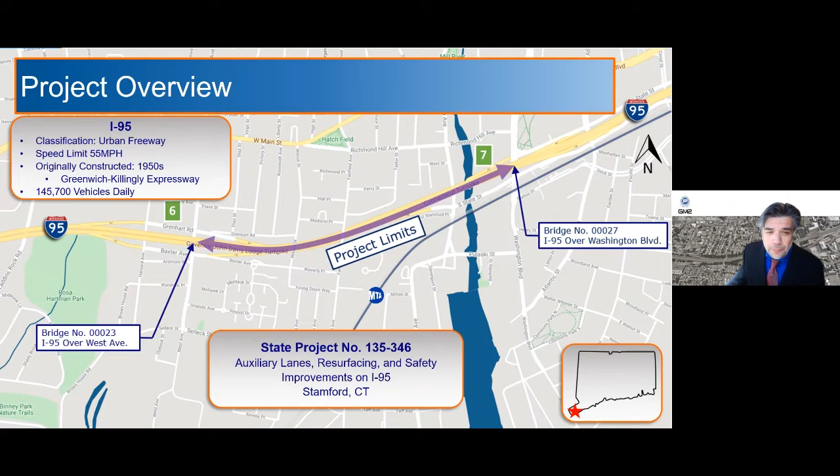The primary purpose of this project is to provide operational improvements and congestion relief. This will be achieved by adding an auxiliary lane between exits 6 and 7 for both northbound and southbound. An auxiliary lane is essentially a lane added between interchanges.

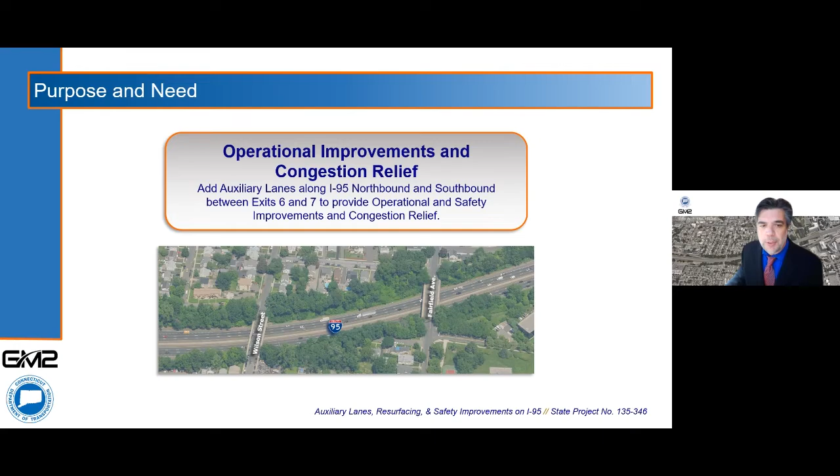The secondary purpose of this project is to extend the service life of I-95. As noted, the highway was originally constructed in the 1950s, and the underlying pavement is almost 70 years old. It has reached its useful service life and requires pavement rehabilitation.

There are also 3 bridges in this contract: Bridge number 24, which is Wilson Street over 95; bridge number 25, which is Fairfield Avenue over I-95; and bridge number 26, which is I-95 over Rippowam River. These bridges will be brought up to a state of good repair. Work will be maintenance related in nature, spot painting, pavement resurfacing on bridge 26 in particular.

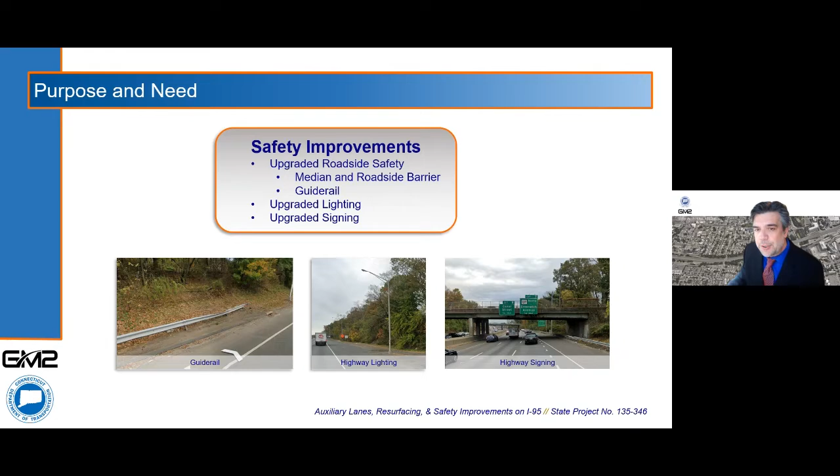At this time, I'd like to turn the presentation to Ryan Allard, our lead highway engineer, who will discuss the proposed design in more detail. Ryan.

Thanks very much, Tony. Again, my name is Ryan Allard, highway lead for GM2 for this project. Before we get into the design, I'd like to give you a little bit of the lay of the land. The typical section that you're seeing here, I'll just define the existing corridor.

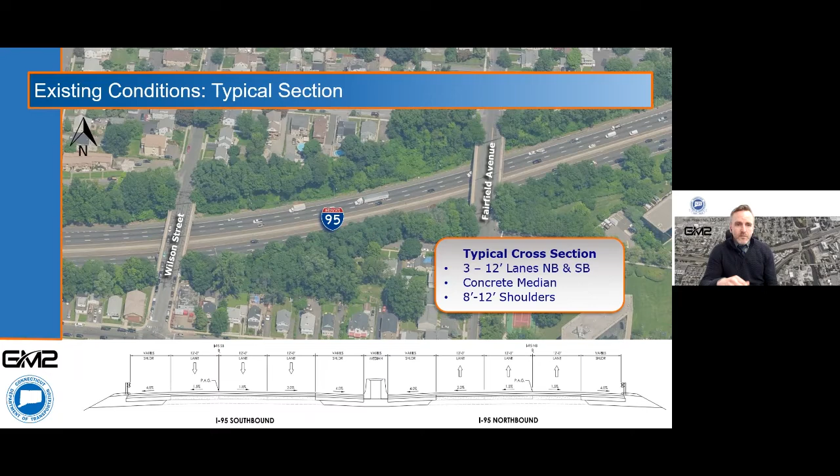Here you're looking at I-95 from left to right, and north is facing up, and New York is to the left of your screen. You have the Wilson Street overpass and Fairfield Avenue overpass as well. Down below, you see a typical section.

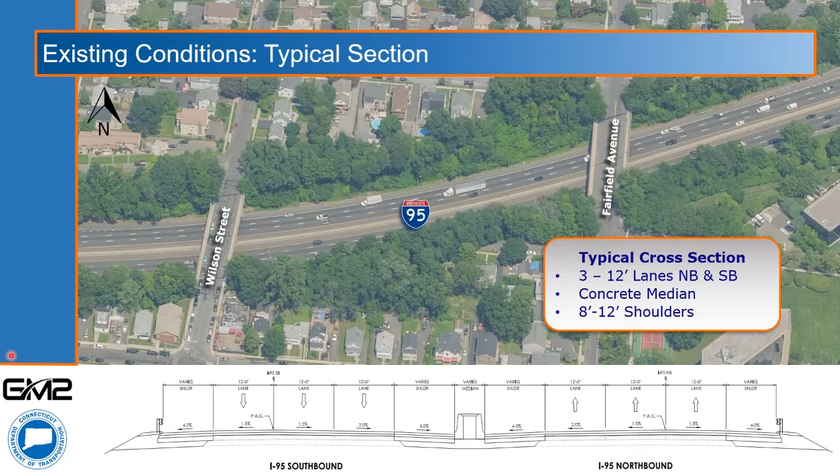This is meant to just represent roughly what the corridor is, nothing very specific here. Right now there are 3 lanes in either direction, separated by a concrete median, with shoulders to the outside and shoulders to the median as well. There are 3 12-foot lanes in both directions, separated by that concrete median. The median shoulders are primarily 12-foot in width. However, along the outside, it varies slightly, so it's about an 8-foot to 12-foot, depending on where you are in the corridor.

A little bit more existing information. Here's the crash data shown graphically. There is a UConn Crash Repository, which is an online resource that we use in order to determine some of the characteristics of the site as it relates to public safety, operations, and congestion.

We took the last 3 years of data from that crash repository, including and up to April of this year. The crash counts for that included 237 total crashes. 73 of those resulted in injury and 0 fatalities in that data set.

What we'd like to do then is take that crash data and process it a little bit and understand the characteristics of the site. So what I mean by that is we have 161 rear-end crashes, which indicates that there's quite a bit of congestion in the area, a lot of bumper-to-bumper traffic, so a lot of front-to-rear crashes. And 53 side swipes.

That's the second most predominant crash type in this area, and what that is telling us is there's a lot of lane changes. So you have a lot of merges and diverges where people are either entering the highway or exiting the highway. It's pretty common for an area like this where you have two interchanges. You can see interchange 6 here and interchange 7 here, not separated by a lot of longitudinal distance. So when you have a lot of people entering and exiting the highway in a very short period of time, you end up with some of those lane change crashes as well.

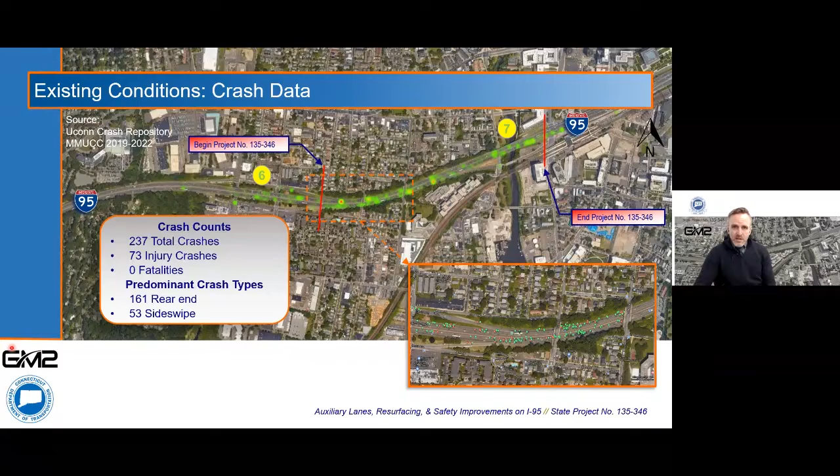At the very outset of the project, we wanted to get a better sense of the condition of the pavement in order to increase the serviceability and serviceable life of the corridor. We want to find out what is the existing condition of the highway itself.

Next is ground penetrating radar, or GPR. There you're using a vehicle to send a signal into the pavement, into the flexible pavement, which is the asphalt. It shoots a signal back to us and tells us more about the condition of the flexible pavement that's on top of the concrete pavement below.

Next, we do a falling weight deflectometer test, or FWD. That's giving us a sense of the health and condition of the concrete slabs below the flexible pavement, and the health of the connection between two slabs as you're traveling along the highway.

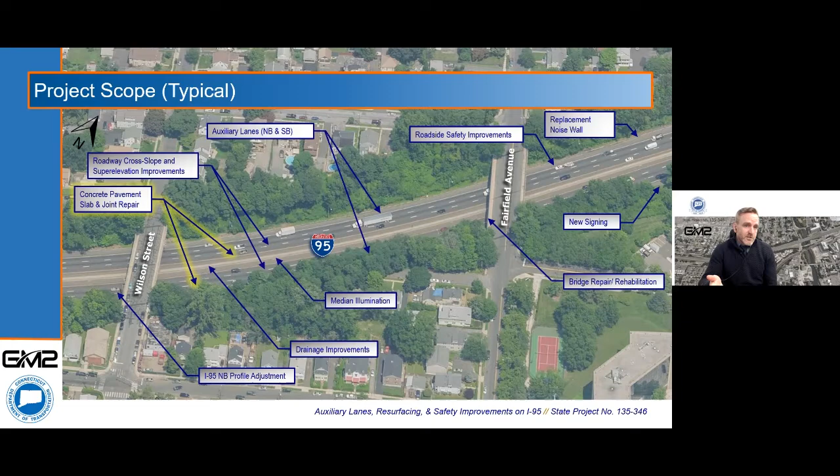First, as I mentioned, we're going to look at the concrete pavement slabs and the joints, and using the data that we found, determine where those repairs are going to be necessary.

There is a profile adjustment that's necessary underneath the Wilson Street Bridge. I'm going to go into a little bit more detail as to why that's happening.

Roadway cross slopes: anywhere that overlays over a period of time have reduced the design speed of the highway itself, we're going to try to bring those back up to DOT standards.

Drainage improvements throughout this area. We are doing some widening as well as cleaning of the existing drainage network.

Median illumination. Right now there's illumination on the outside. We're going to move that to the median wherever possible.

We did mention the new auxiliary lanes, one auxiliary lane for each bound. So where there's an existing 3 lanes, now there's going to be 4.

And bridge repair rehabilitation. There are 3 bridges within the corridor. And roadside safety improvements. Tony mentioned MASH earlier, so any roadside safety, which is going to include any barrier or metal beam rail. New signing.

All signs in this corridor are going to be replaced. And anywhere that a noise wall is impacted by the widening that's happening, this is specifically what you're looking at here, on the north section of this corridor, and we'll go into a little bit more detail on that as well.

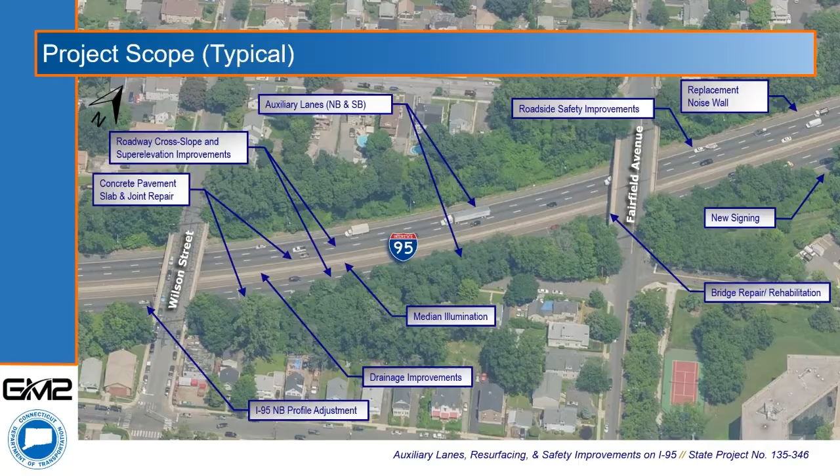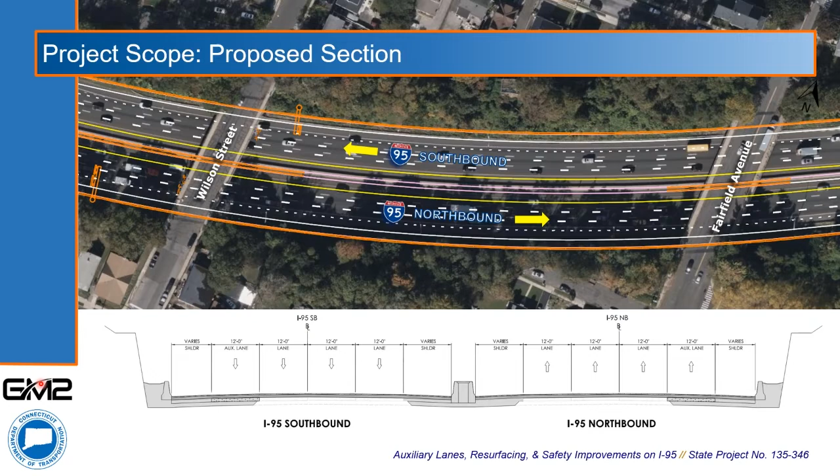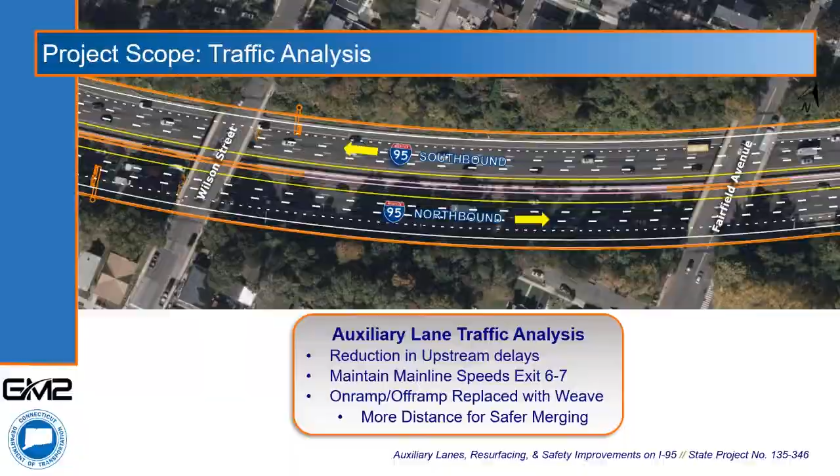So when we were first deciding if we were going to add these auxiliary lanes, we did a traffic analysis. This resulted in us finding that there is a reduction in upstream delays. That means if you're traveling southbound back towards New York, you're going to experience less delays without this bottleneck that's occurring today. You're able to maintain those mainline speeds, so the highway speeds going through this corridor are going to stay at a safe speed.

This is primarily due to what I was talking about earlier, where in the existing condition you have a lot of travelers coming onto the highway and exiting the highway and having to merge into that outside lane. You no longer have that condition with an auxiliary lane. You have a longer, safer longitudinal space in which to get on or off the highway.

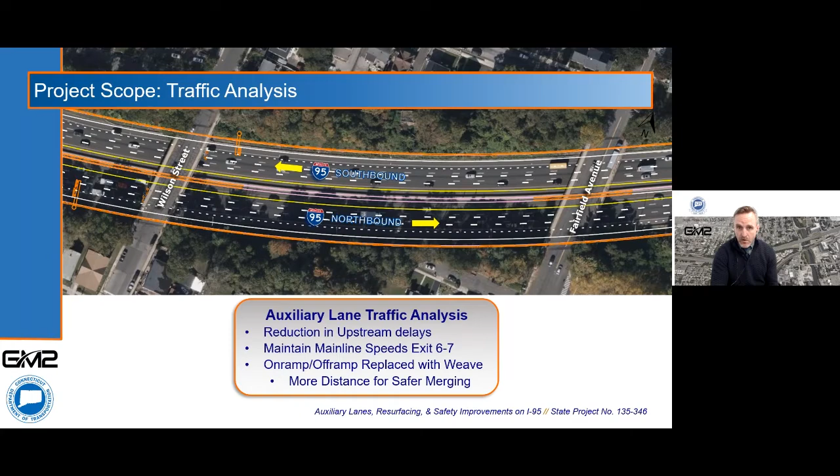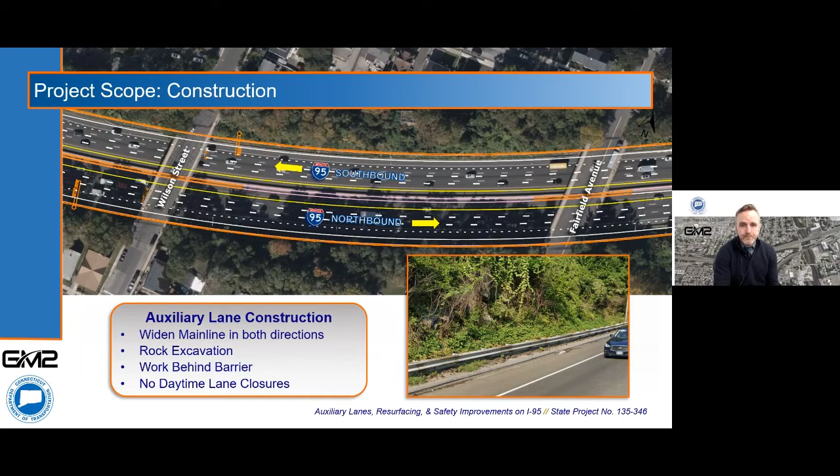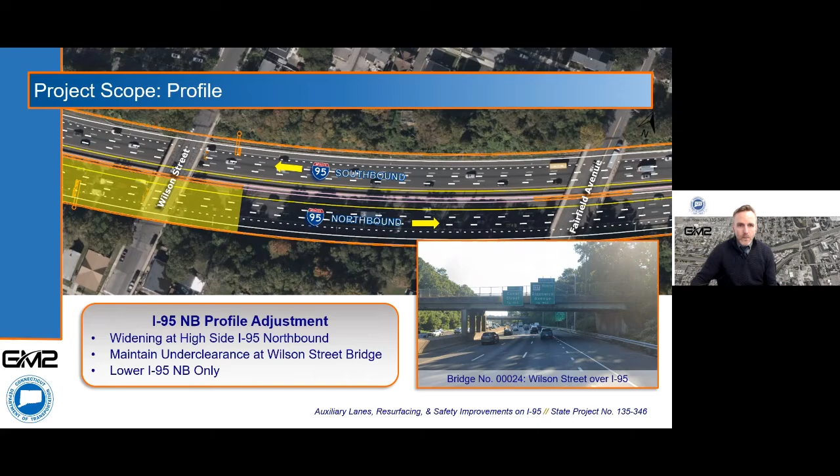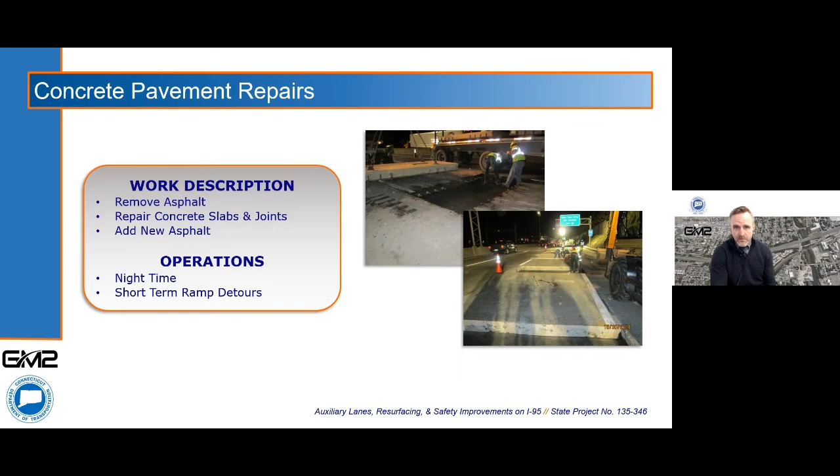There are 3 bridges within this corridor: Bridge 24, 25, and 26. Those are the Wilson Street Bridge over 95, Fairfield Avenue over 95, and 95 over the Rippowam River. Some of the scope happening on these bridges includes some barrier work, some roadside safety to protect the bridge elements. We are widening towards abutments and also just increasing the standard safety of the area. Some steel maintenance of the overpass bridges, as well as some overlay of Bridge 26.

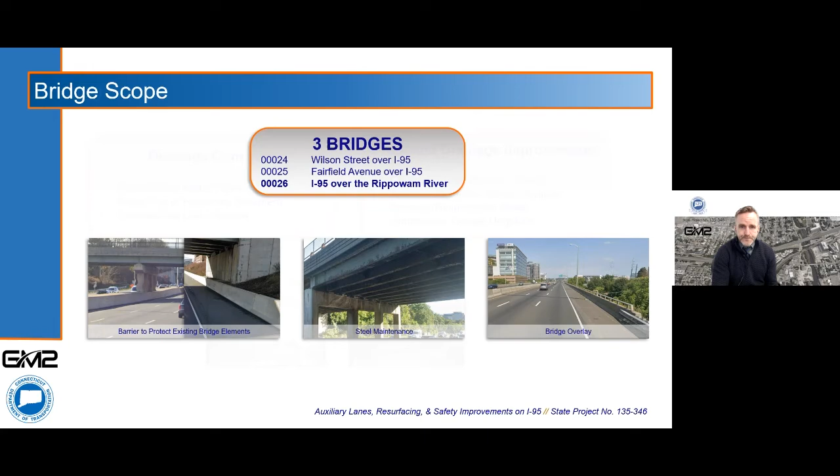Talk a little bit about the drainage in this area. So there are some drainage concerns in this corridor, or any corridor of this age. A lot of the metal pipes have reached their serviceable life, or they are beyond it. So we are going to take a look at those. A lot of them are full of hardened sediment, and as you can see in the picture below, it's a bit more than just sediment.

A lot of the catch basins in the area are deteriorated and in some state of disrepair. So proposed drainage improvements include cleaning pipes and catch basins as necessary, adding new catch basins where required. We're widening either side of the highway, so catch basins at the current edge of pavement need to move to the new edge of pavement. Those will be new basins, not moved ones. We'll also replace or reline any metal pipes wherever necessary, along with some stormwater quality upgrades in keeping with MS4 guidelines.

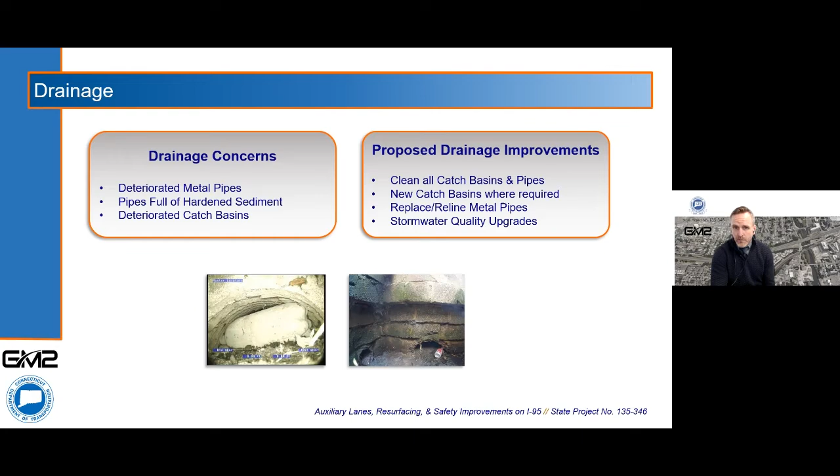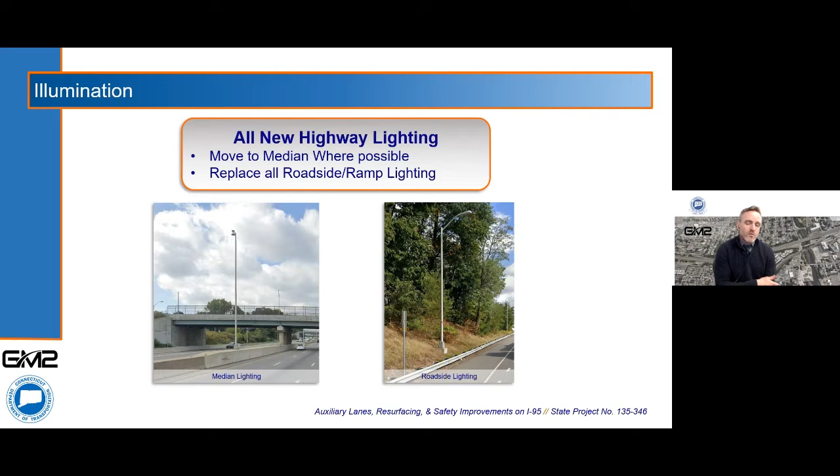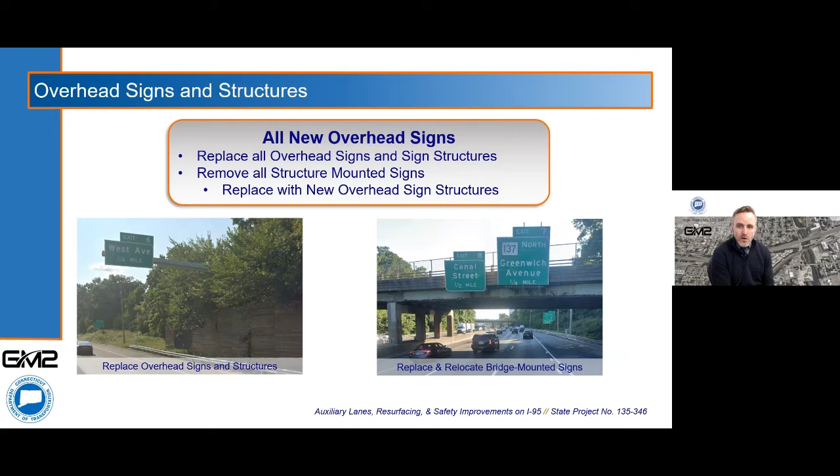I mentioned some lighting - all new lighting is going to be installed here, so every light fixture will be replaced. Wherever possible, we're going to move that lighting to the new median. And overhead signs - all signing is going to be replaced as part of this project. If there are overhead sign structures, those will be replaced and new signs added. Any signs attached to the outside of existing structures, like the overhead signs attached to Bridge 24, which is Wilson Street over 95, will be taken off and added to a new overhead sign structure.

Next, is this a type 1 project? There are numerous options for why this would be a type 1 project, and as we mentioned numerous times, we are adding auxiliary lanes to either direction, so yes, this is a type 1 project. The noise study is ongoing - we're looking into the area and determining if noise abatement measures are required for this project. That study is ongoing and we don't know those limits yet, but we will.

In terms of staging, I'll go over briefly how it impacts your commute and nightly life. The criteria is 11-foot travel lanes, 2-foot minimum shoulders. As you can see below, there's some milling operation behind cones, and on the right you can see lanes free with barrier on either side. If any lane closures are necessary, whether for drainage repairs, concrete pavement repairs, or just milling and paving, those will happen at night and possibly on weekends, but very short term. The very next morning, all lanes will be open and traffic will flow freely.

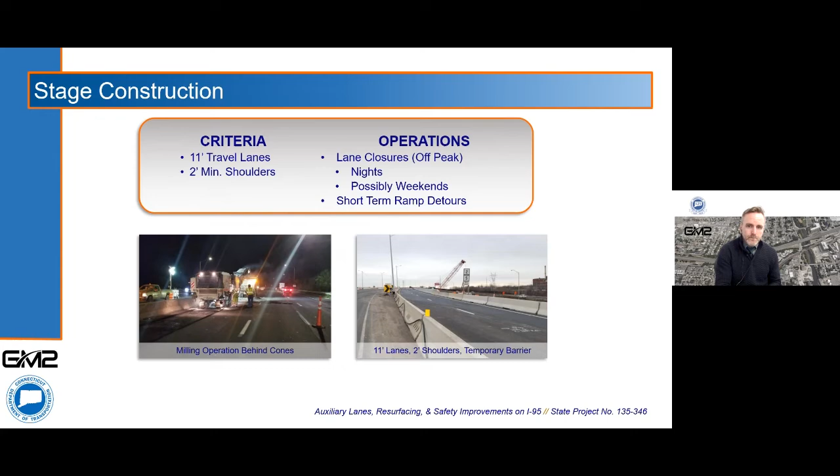In terms of permitting, to attain the necessary permits for a project of this size, we have to go through various agencies through the state and coordinate those as the project goes. We will obtain necessary permits for flood management and construction activities. As design progresses, coordination will also happen with agencies such as the Coast Guard, Fisheries, and Army Corps. There are no proposed impacts to wetlands or water courses, and no impacts to any 100-year floodplain, so this project is relatively not impactful environmentally to the area.

So that is my piece. With that, I'm going to hand it back to Tony, and he's going to discuss the schedule and costs.

Great, thank you Ryan. As discussed earlier in the presentation, the department has selected this project for a design-build procurement. The design-build team that provides the best value to the state of Connecticut will be selected for final design and construction of this project. The DOT will issue a request for qualifications in early June of this year, then shortlist typically 3 design-build contractors to receive the request for proposals in early August of this year, with final design anticipated to start in the fall of this year.

We anticipate construction or shovels in the ground, in terms of where you really see actual work in the field, in the summer of 2023. We anticipate a 2-year construction schedule. The construction cost is approximately $30 to $40 million, with 90% federal and 10% state funding.

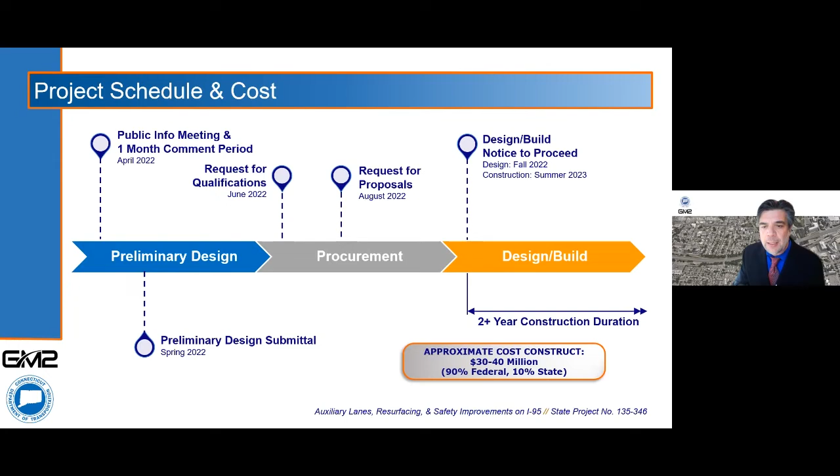As indicated, the project is in the preliminary phases of development, and really the purpose of this meeting is to engage the public. We are here to address your questions as well as understand your concerns. That being said, there are several options for you to submit your questions and comments.

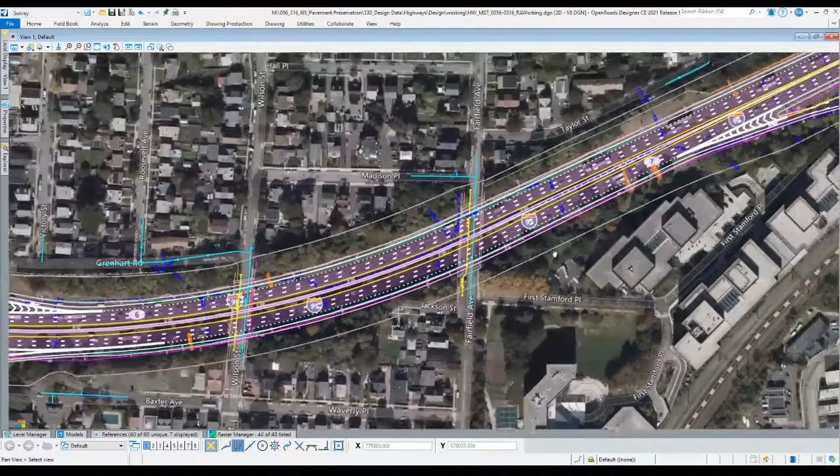Traveling north underneath Wilson, underneath Fairfield, and now you have the northbound exit to Greenwich Ave. The limits extend further over to the bridge, which is bridge number 27 over Washington Boulevard. The project limits also include the southbound on-ramp from Washington Boulevard onto 95 southbound. Back to you, Jeff.

Thank you, Ryan. All right, looks like we have another question that's come in. Somebody asking if there will be any detours associated with the construction. Tony from GM2 is going to take this one. Tony? Absolutely, thank you, Jeff.

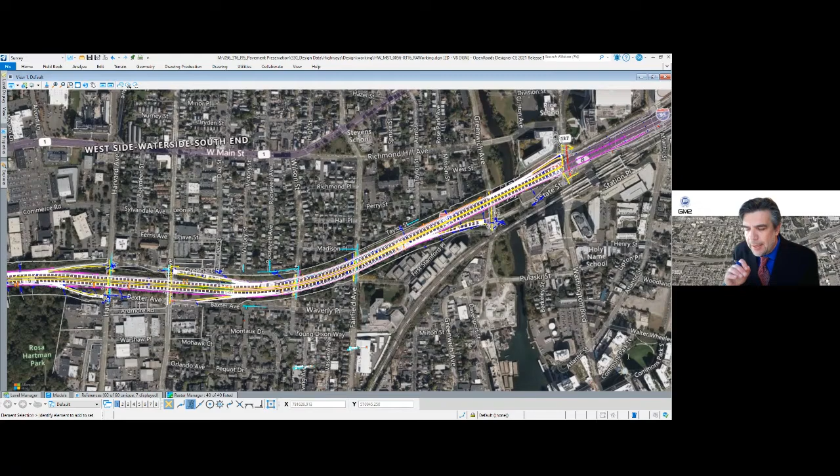Tony Margetta, GM2. So there are no long-term detours proposed under this project. There is potential for some short-term detours during the ramp construction, basically the repair of the slabs if the width of the road is less than 30 feet. Those will be very short-term during nightly operations, off-peak during the 4 to 5 hour night windows. In the morning time, they'll be right back open. So there is potential for some very short-term detours for the ramp work, but those will be off-peak periods during allowable limitations of operations. Back to you, Jeff.

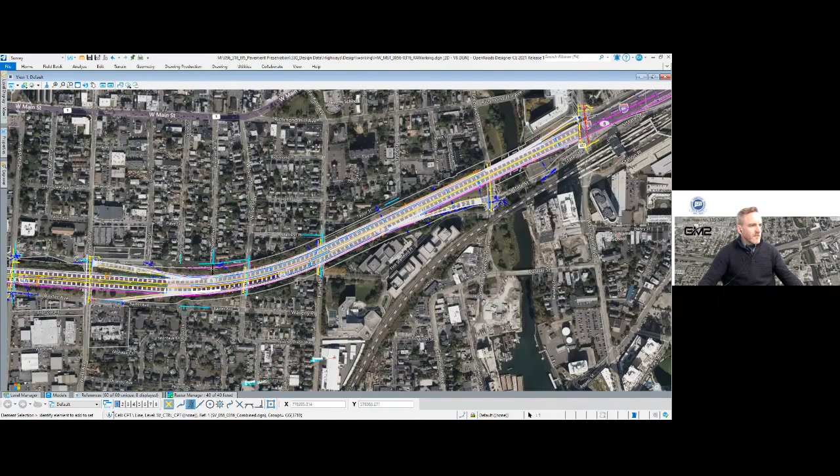I'm going to share the CAD view again, because I think that's the easiest way to give the lay of the land here. We have 95 left to right, New York is to your left and north is up. I'll start at the southern limits.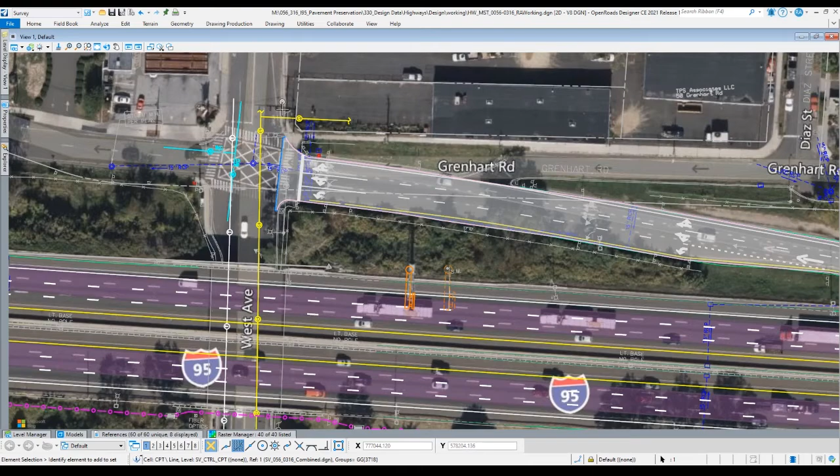So here you have West Ave, and you can see the limits of our impact to the local roads are limited to just the termini of the ramps. As soon as you're off this ramp, you're off the limits of the actual construction of any of the pavement in this area. So West Ave is by and large untouched, as well as Baxter Ave.

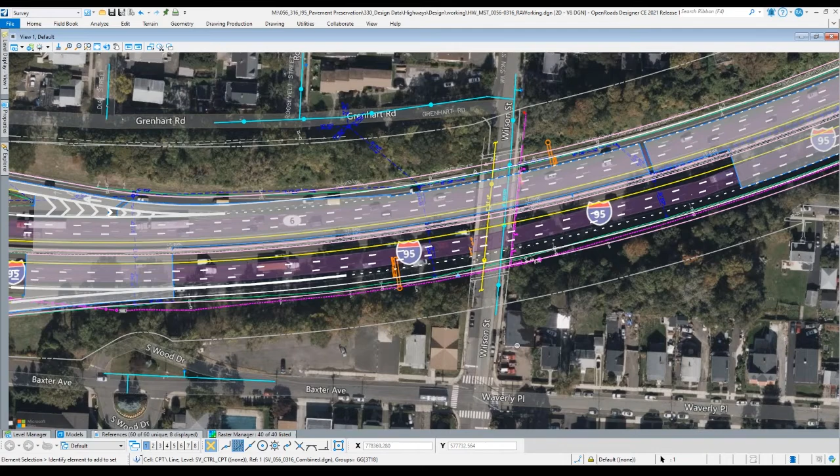As you travel north, this is the Wilson Street overpass, Bridge 24. This is the area where I mentioned in the presentation that we're actually lowering I-95 northbound. The reason why we're lowering 95 northbound as opposed to raising Wilson Street is because we don't want to impact the neighborhood there. If we were going to replace that bridge entirely, or jack that bridge, we would end up causing right-of-way impacts or other costly impacts associated with the neighborhood and local residents in that area.

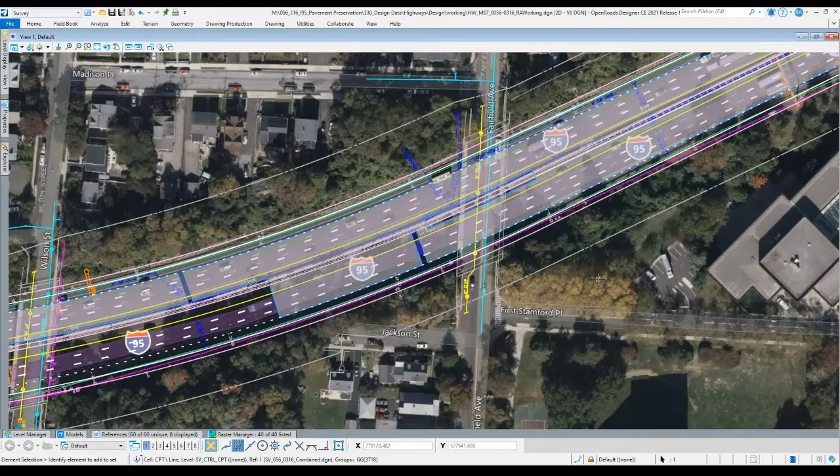If we continue traveling north, Fairfield Ave is staying untouched. All the work there is going to be below.

Traveling further north, here we have Greenwich Ave, and it's the same situation here as it was to the southern ends, where our saw cut limits are going to be confined really just to the end of the ramp. I know this area has been under construction recently, so we're going to try to fit in and not disrupt any of the new construction that happened there.

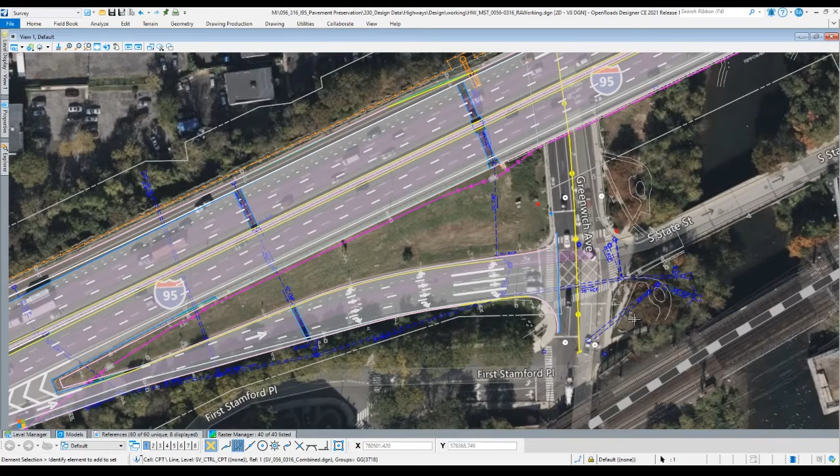And it's the same situation here on Washington Boulevard as well, confining our construction limits just to the ramp itself and not impacting Washington Boulevard.

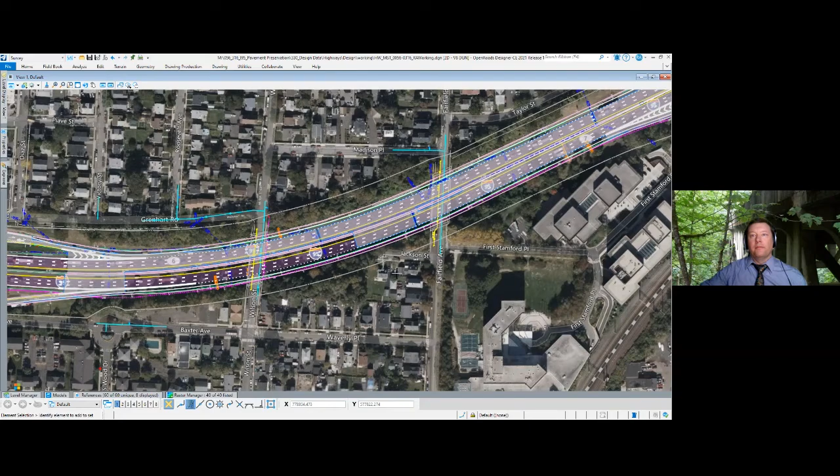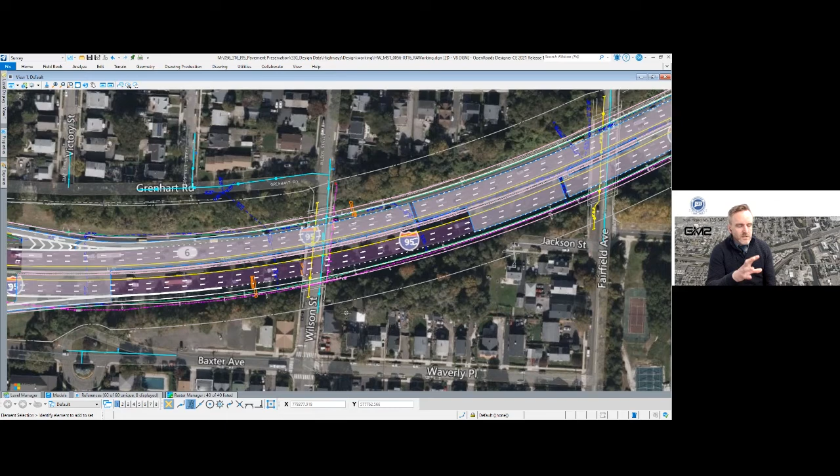I'll take that one. Looking back at the CAD, since it's easier to look at the bridge and talk about it—this is the Wilson Street Bridge, bridge number 24. Any work being done to the bridges is, for the most part, being done because of the work happening down below. As we're widening towards the Wilson Street abutments, there's going to be some work just to make sure we're not undermining the abutments or anything there.

We're doing some minor maintenance, like beam end painting, and there's some utility work being done. There are some abandoned utilities that can be removed, and some existing utilities that can be armored and locked into the superstructure that's there.

However, the work along the top side is very limited. There really isn't anything that has to be done to the top side that isn't a direct reflection of what's happening down below. If there's any maintenance to maybe a joint or something that needs to happen up top, that would be very short duration. However, we're very early into the design phase, so we'll know more about that as we go forward.